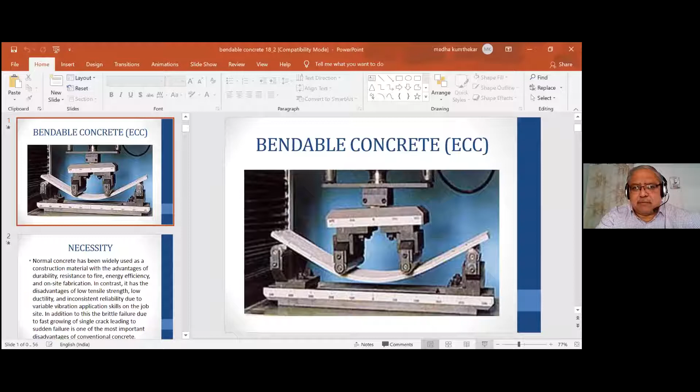This is what is called bendable concrete. This figure itself indicates how the concrete flat slab is undergoing deformation without any sort of failure signs in the form of cracks and so on. Because we cannot expect this type of property when the concrete is subjected to bending, subjected to flexure.

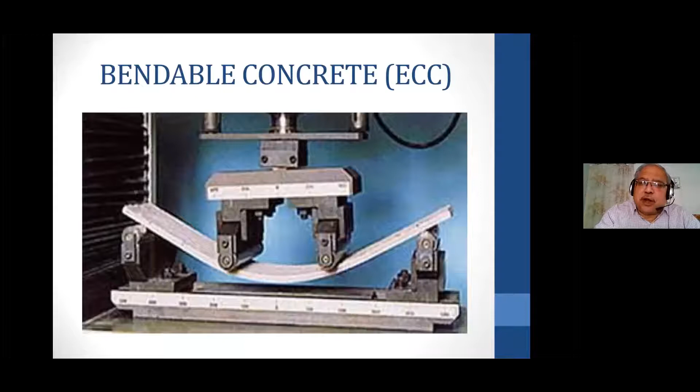Let me show you the necessity, and this is the point where actual failure may take place. Even at the time of failure, which is about to now collapse, there is no single signature, no single signal of a crack. Still, it has undergone a huge amount of deformation, which is not possible, which does not match the property of concrete. Hence, deliberately, the name given is bendable concrete. Technically we call it engineered cementitious composites. It is basically a composite structure.

It is basically a composite derivative of fine aggregate, cement, some sort of admixture, and mainly it uses typical fibers called PVA, polyvinyl type fibers. Here we are not using coarse aggregate, and hence we don't practically call it 100% concrete, but it is known as engineered cementitious composites.

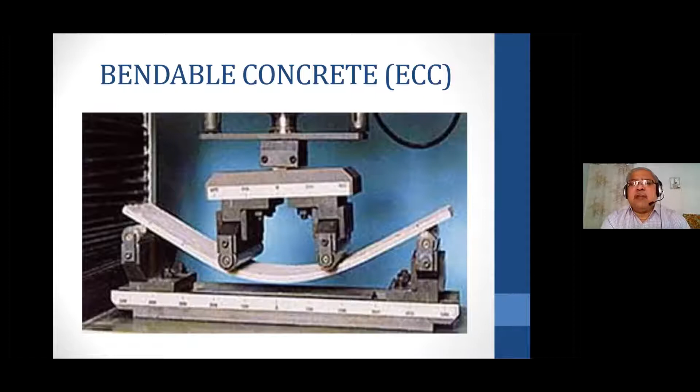What is the necessity? The necessity is very clear. As I said, concrete has inherent advantages: durability, resistance to fire, it is energy efficient, on-site fabrication is possible. We can pour concrete in any mold, in any shape, any alignment, because it has two phases.

What is called the green or plastic phase, and second is the hardened phase. But the major disadvantage is lower tensile strength, ductility, and inconsistent reliability due to variable vibration application and skill at the job.

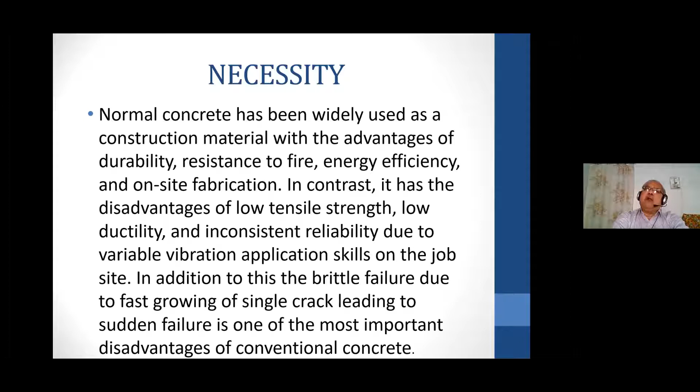Under such situations, it may lead to brittle failure, which is very risky, because in the case of steel structures, before it collapses, before it yields, it has what is called a plastic zone. If you test a steel bar under the UTM, you'll have some elastic limit, then it goes to the plastic stage, then it forms a hinge and collapses.

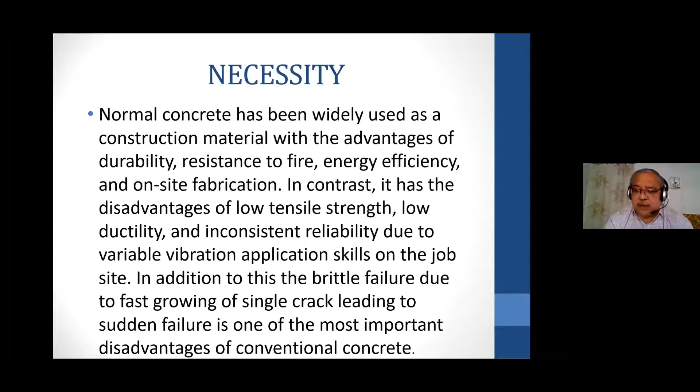But in the case of a concrete structure, that is not the story. When it crosses elasticity, it generates a crack, and after the crack generation, it leads to sudden collapse. This brittle failure creates a problem witnessed many times in the world, and that is why we have to change this particular property.

And that property, when changed, has other advantages, as I showed you in the first or second slide, where the concrete undergoes deformation without generating any crack. This is the introduction - conventional concrete is almost unbendable. The lack of bendability is a major cause of failure.

Considering this factor, bendable concrete has been developed, called engineered cementitious composites. Technically, it is a composite capable of exhibiting considerably enhanced flexibility. Let me tell you, my friends, in the Government College of Engineering, Karad, we could develop flexibility almost 600 times that of conventional concrete.

It is basically reinforced with fibers called PVA fibers. Since it was sponsored by L&T ECC, we could get the fibers from China at that time. But nowadays I was told these fibers are readily manufactured by Reliance and this group. Also some other competitors are developing them, so while it was slightly costly then, now it is comparatively cheaper.

ECC is made from the same basic ingredients, nothing changed, with high range water reducing agents, and we don't use coarse aggregate, hence it is more a mortar than concrete. It is just to prevent the problem of ceramic brittleness and rigidity, which is the basic behavior of conventional concrete.

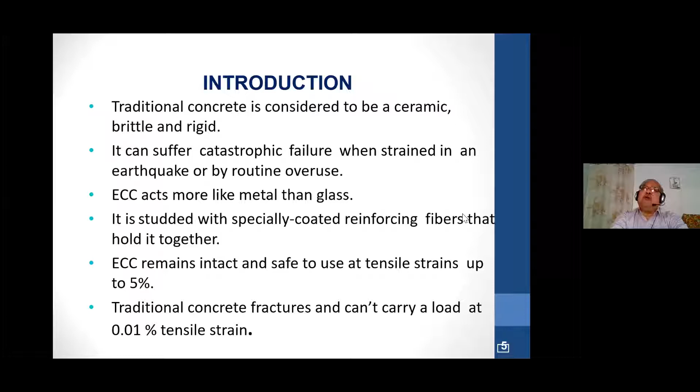Then ECC remains intact and safe to use at tensile strains up to 5%, which in the case of concrete we cannot even go up to 0.02 or 0.01, not even up to that range. Here we can exceed that, as you can see in the pictures I shared with you.

The concept of ECC is cement mortar-based fiber reinforced composites, which has superior ductility, almost 600 times the ductility of normal concrete in tension. These composites are composed of cement, sand, a small amount of admixture, and an optimum amount of fibers - polyvinyl alcohol fibers. ECC utilizes the same ingredients as FRC, except without coarse aggregate, and employs a much smaller amount of fibers than most high performance fiber reinforced concretes.

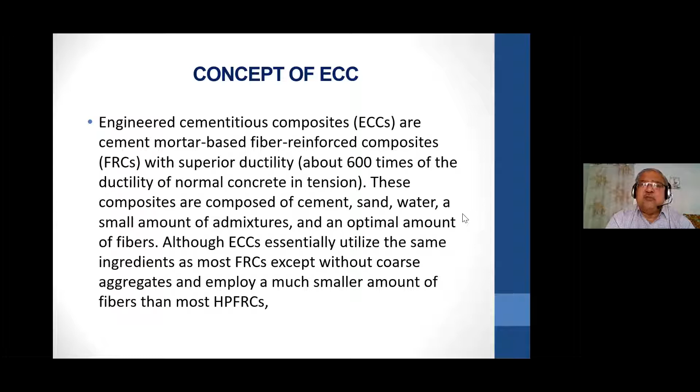In the case of high performance fiber reinforced concrete, the fibers may be between 2% to 5% or even more than that. Here we are using a very small amount. I will share the mix design with you also. These are simple ingredients, nothing special except the PVA fibers.

As I said, this concept was first developed by Professor Victor Li of Michigan University in the US. Here, the employment of PVA fibers is basically to increase what is called ductility.

Fly ash is a filler. And as it is a pozzolanic admixture, it gives the advantage of, one, improving the workability by acting as a ball bearing. Second, the heat of hydration is reduced to a great extent. Third, as the heat of hydration is reduced to a great extent, thermal cracking is not induced. As normally the crack is not developed, there are no chances of propagation of the crack, and hence the brittleness of the concrete can be reduced to a great extent.

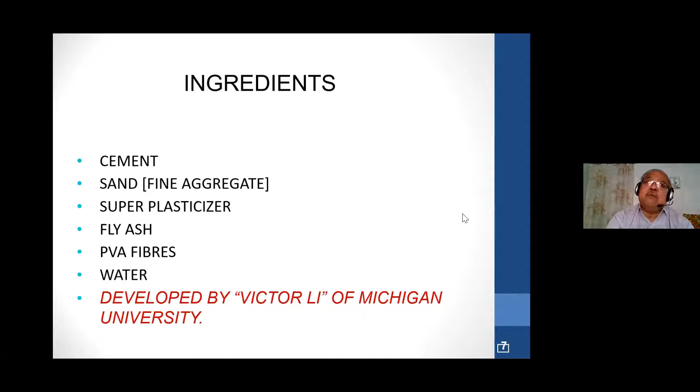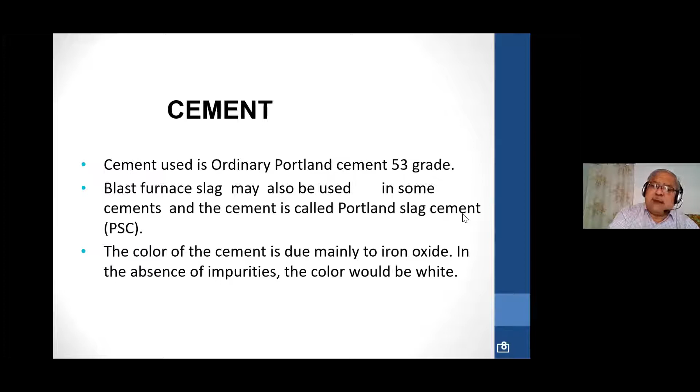This is the cement - in fact, we normally use conventional cement. Blast furnace slag can also be used because it has the inherent property of pozzolanic admixture. In fact, we used conventional cement at that time because Portland slag cement was not available, but now it is seen that using Portland slag cement, you can derive better advantages.

Nothing special - we have used typical fine silica sand, which is most desirable. We can also go for normal sand, but if normal sand is not available with the proper fineness modulus, we can go for blended sand. Fly ash, silica fume, blast furnace slag - anything which is pozzolanic can also be blended. In our case, we went with fly ash.

What is this super plasticizer? It has a major use in this particular thing. As I said, when the concept of plasticizers emerged maybe 15, 20 years back, when we were in the field, the concept of the plasticizer was to create deflocculation system. Flocculate is basically material coming together - when chemicals were added, deflocculation of the material used to take place, and then workability was automatically enhanced.

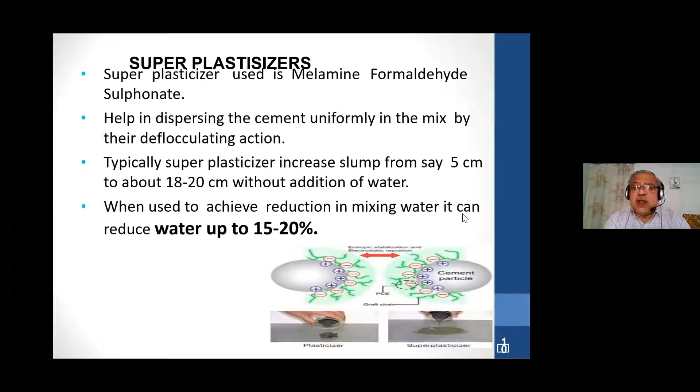But today we have one more class, rather an enhancement of the class, called super plasticizers, where these materials induce what is called charges, positive or negative. As everybody is aware, like charges cause particles to repel rather than come together. As the particles are separated due to this electrostatic phenomenon, we get better workability. That is why a small dose of super plasticizer is equally enough to achieve workability enhancement. When used to achieve reduction in mixing water, it can reduce water content up to 15 to 20%, depending upon the mix design you carry out.

Fly ash, the same thing - I again say fly ash is nothing but high reactive silica. It is not the ash which comes out directly from the chimneys of the thermal power plant - let us remove that wrong notion. We have this fly ash which is collected from the stack of the chimney by a process called electrostatic precipitation. This is successful in reducing heat of hydration without loss of strength, and increases ultimate strength beyond 180 days, while providing additional fines for compaction.

It has multi-phase advantages. One, these pozzolanic admixtures generate or trigger secondary CSH gel formation from material which is practically useless for us - that is nothing but calcium hydroxide. If we don't take care of this during the hydration process, many of you working in the field will find, when you de-shutter concrete - mainly for slabs or beam column junctions - white patches. These white patches are purely due to free lime, calcium hydroxide, Ca(OH)2. This hydroxide is basically inert in nature, nothing to do.

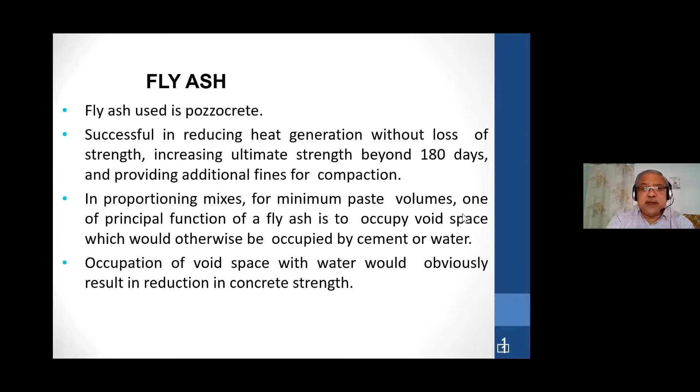At the same time, it also becomes what is called green concrete, because we are using material that would otherwise be waste and would disturb environmental stability. Hence this is also a typical type of green concrete. Occupation of void space with water would obviously result in reduction of concrete strength, which is eliminated in this particular case with the use of fly ash.

As you are aware, fiber reinforced concrete is not at all a new thing. We deliberately mix fibers into concrete, which is called fiber impregnated concrete. These fibers are used for many purposes.

One purpose is abrasion resistance, mainly to increase resilient property, shock absorption, increase tensile strength, reduce permeability of the concrete, and reduce crack formation and propagation. Hence these are now an inherent material, commonly used where concrete is subjected to abrasive stresses, impact stresses, and strain energy. Whenever these types of conditions exist, normally we prefer fibers.

There are a number of fibers in use. Some commonly adopted are glass fibers. It may be what is called polyester, nylons. It may even be carbon fibers, which are called smart fibers. If you know the term bulletproof jackets, they are nothing but applications of fibers.

These fibers can resist shock and transfer the energy or momentum that hits the body of the concrete more effectively. Hence these have a lot of applications in concrete technology.

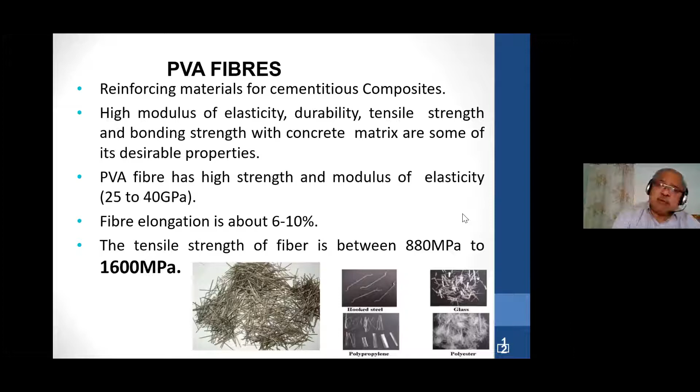These fibers are flexible in nature. They can be placed in any direction, and they normally work by standing perpendicular to the direction of crack propagation. Hence they are commonly called crack arresting fibers.

Regarding water: regular conventional water with pH between 6 to 7 is normally recommended, because concrete itself is alkaline material. So water should have a pH between 6 to 7.5, which is most desirable. The only requirement is it should be free from organic impurities, because along with the water, they enter into the body of the concrete.

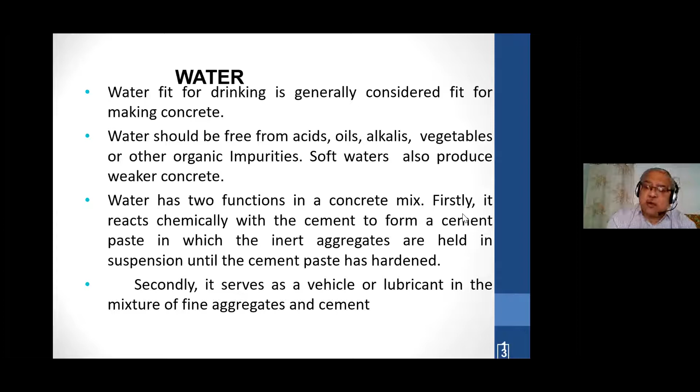If the material is organic, biodegradation may take place and create voids and so on. Hence, the water should be potable water - that is enough. Salty water is risky because when we add salty water to the concrete, there is a problem of leaching, a problem of corrosion, and a problem of accelerated formation of cracks. Hence it should be simple potable water which has to just serve as the lubricant. It has to increase the workability in an optimum fashion, and it has to cover the matrix of the aggregate to get the strength. This is the simple reason.

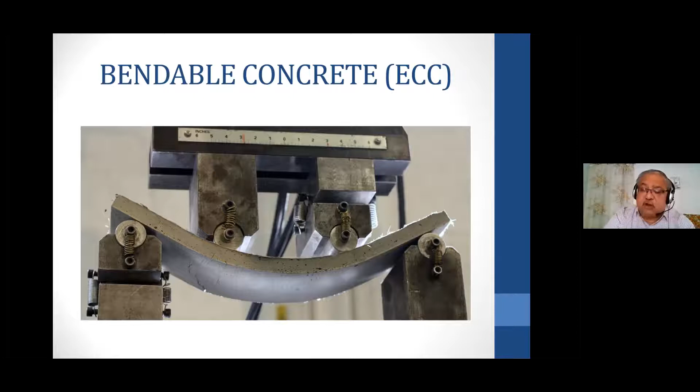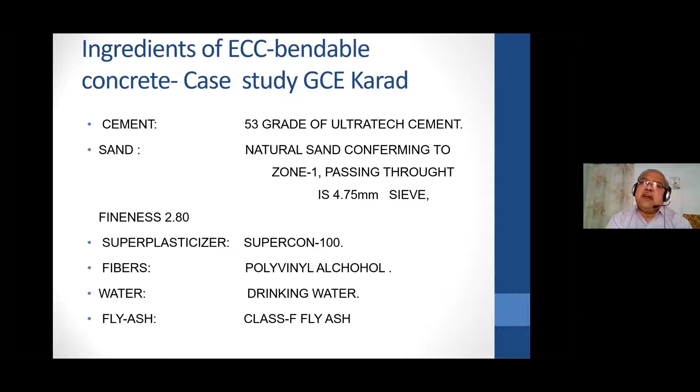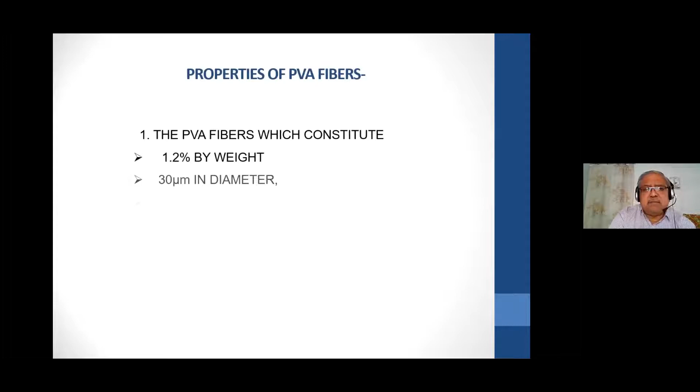Fibers were polyvinyl alcohol fibers supplied from China. Conventional drinking water was used, and the fly ash was class F fly ash, which we brought from the nearby Eklahare power station from Nashik, because that was the nearest supply of fly ash. These are the properties that we had tested for the fly ash.

The PVA fibers constitute 1.2%, and are 30 microns in diameter - 30 microns means half of my hair's diameter. We chop those pieces into 6 mm bar length, because if we place them in a bundle, or in unnecessary longer length, it is going to act as a nucleus - it will basically bundle at only one point. There should be proper dispersion of the fly ash and the PVA fibers, and the dispersion should be uniform throughout the body of the concrete.

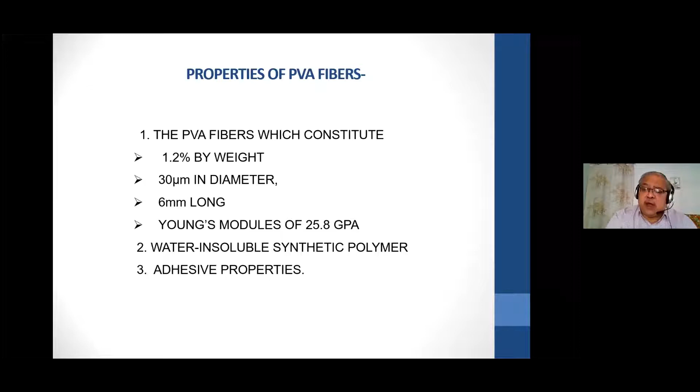To ensure that, this is basically called the aspect ratio of the fibers. We maintained that aspect ratio by considering the diameter to be 30 microns, and we kept the 6 mm long chopped pieces, thoroughly mixed uniformly throughout the body of the concrete. The Young's modulus of that particular fiber, when tested, was 25.8 GPa. Water-insoluble synthetic polymer was used, and they have some adhesive property. Basically, we could produce a better type of result.

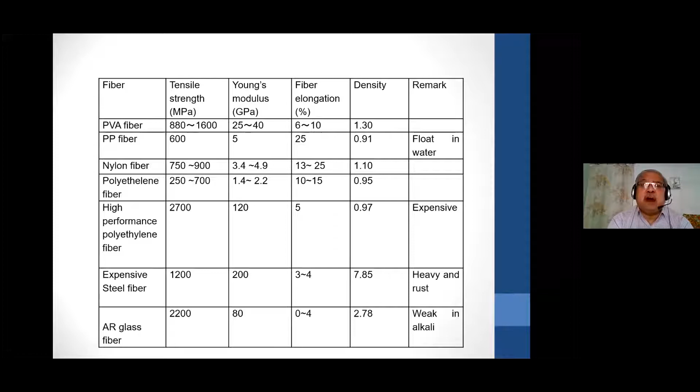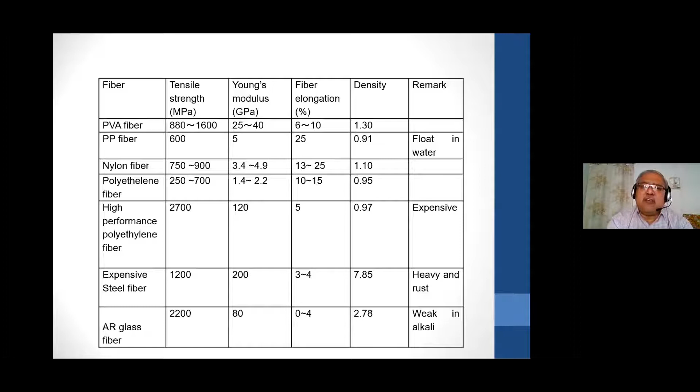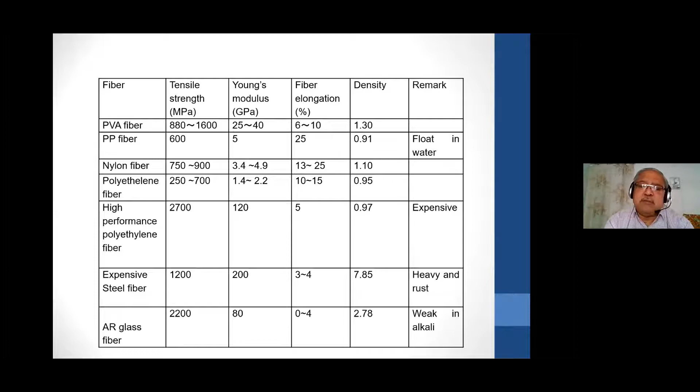We have tested so many fibers before accepting the PVA fibers as the best suited fibers for the ECC. We tested PVA, polypropylene, nylon, polyethylene, high performance polyethylene, expensive steel fiber bars, and AR glass type fibers. Every fiber was tested in the laboratories for various properties - tensile strength, Young's modulus, elongation, density, and so many other things. We found that the PVA fibers gave us better results compared to the others, because we could not take a chance with this particular mix design, since ultimately it was used for the monorail, where the structure is subjected to heavy static, dynamic, and rolling loads.

And after doing this, we could find out the PVA fibers like this.

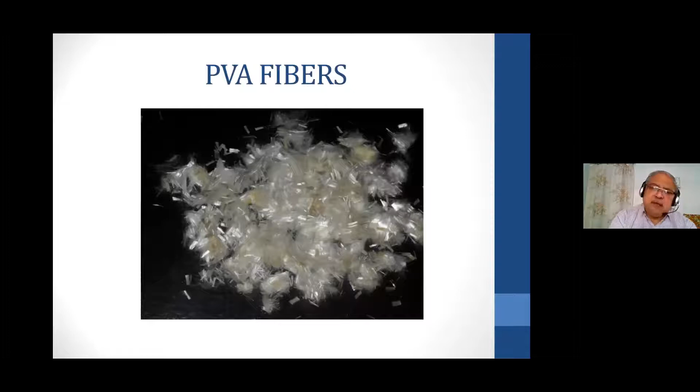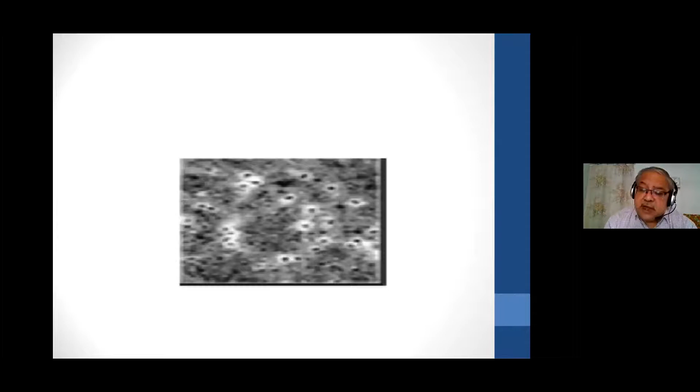After chopping, we got the PVA fibers like this. We cannot just dump them like that; in fact, they must be placed in a very typical fashion so that under the scanning electron microscope, this was the structure of the fibers. You'll find there is no gap left out. The fibers are placed in a very different way, dispersed very perfectly and uniformly, and then we could start with the mix proportion.

The mixing included cement, fly ash, and fine aggregate. We started with so many things. Ultimately, 1.2% by volume was found to be qualified. The superplasticizer used was 1040.47 ml per bag, and the water cement ratio was kept very low, at 0.274.

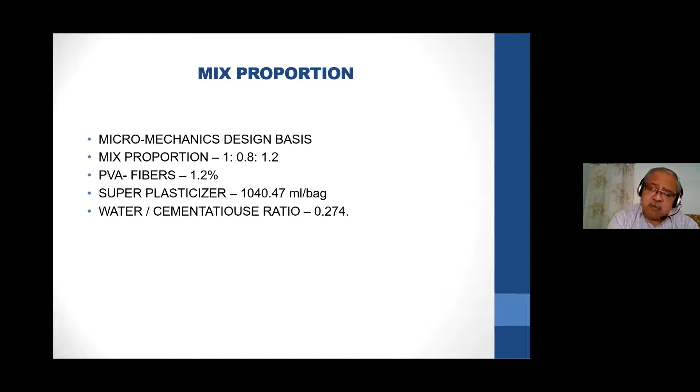As I said, we could maintain this purely due to two things. One, since there is no coarse aggregate, workability is not a great issue. Second, the fibers help increase the workability. Third is the volume of fly ash—since the particles are very tiny, more than the cementitious particle, every particle acts like a ball bearing, and we could easily get the workability.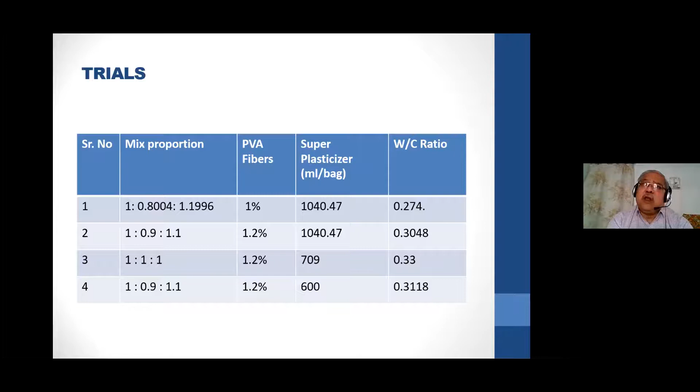This is how we started. We considered so many trials—this is a trial mix, a combination of various materials. These are the trials we thought of, by changing the mix proportion, the percentage of fibers, the superplasticizer dosage, and accordingly the water cement ratio. Almost 100 trials were carried out with all these combinations.

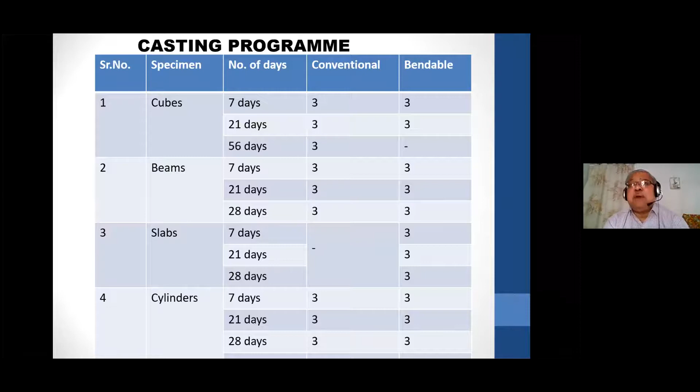We also cast cubes, beams, slabs, and cylinders to conduct all possible tests required to verify and audit the performance of the PVA concrete. Tests were carried out at 7 days, 21 days, and basically 56 days to begin with, just to check whether the strength gaining mechanism was going as per our expectation, following the path precisely, or whether there were abrupt changes in the strength or properties of the concrete.

To begin with the final tests, we tested in the presence of the L&T people. Compressive strength is very essential to decide the quality of the concrete, because this characteristic compressive strength is essential to understand whether the concrete can take the loads or stresses.

Split tensile strength—as everybody knows, we cannot carry out direct tensile strength tests on a concrete specimen. It has to be in the split form, where the cylinder is placed under the UTM along its length, and we measure the stress required to break or rupture it. Using the empirical formula, we could understand the tensile strength of the concrete.

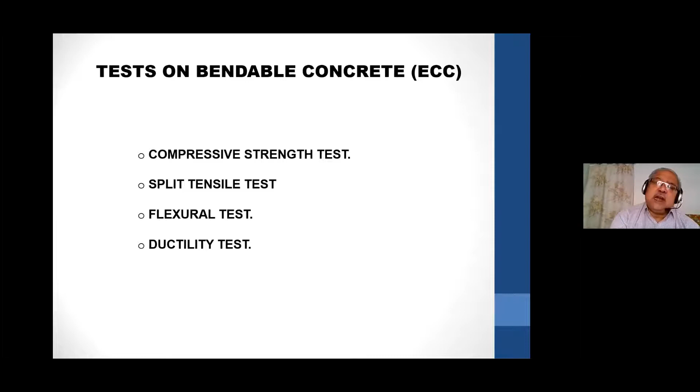Flexural test, in fact I have shown you—basically a beam or the flat portion of a slab of concrete is taken and put under the UTM. We check how much flexibility it can receive, and the ductility before really going for cracking—what type of deformation it can sustain. That is also carried out.

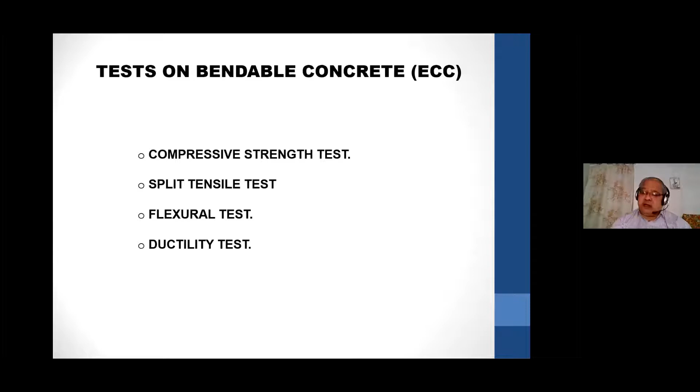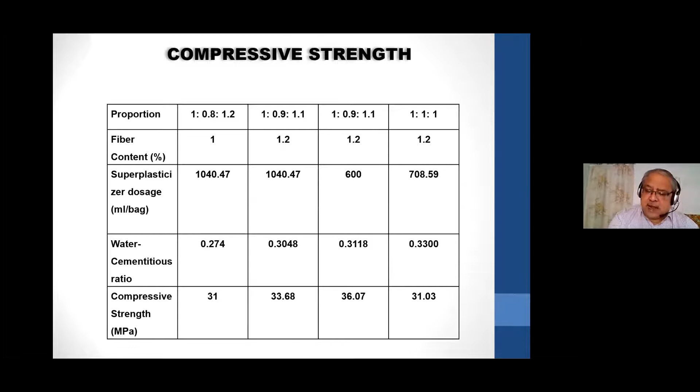These are the compressive strength results for the various proportions we carried out, where we changed the water cementitious ratio, superplasticizer dosage, and fiber reinforcement. After doing all these combinations, we could test the fiber, and this was the compression strength with age. You'll find it is perfectly linear after some time.

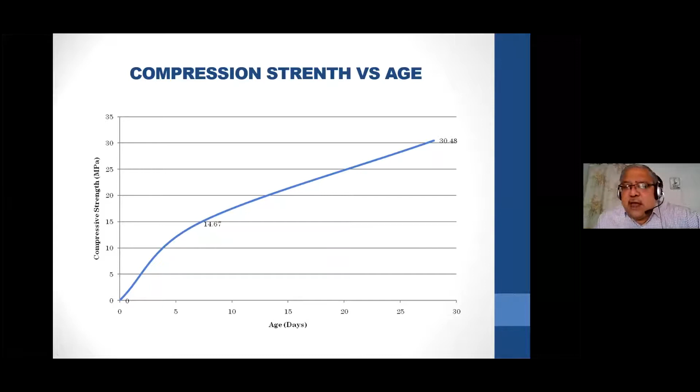This is because, due to the presence of the pozzolanic admixture, the secondary CSH gel started forming after around 16 to 17 days. In the normal conventional case, the graph could have flattened out somewhere, because in conventional concrete the strength gaining mechanism normally becomes almost flat after 28 to 30 days. But here, the strength increasing mechanism continued, and will still continue up to 180 days or so. Hence, as the age passes, the compressive strength goes on increasing—this is the beauty of pozzolanic concretes.

Then we went for the split tensile strength, as the concrete is good in compression but weak in tension. At the same time, when structures are put under loading and in use, over and above the compressive forces and compressive stresses, it is also subjected to tensile stresses.

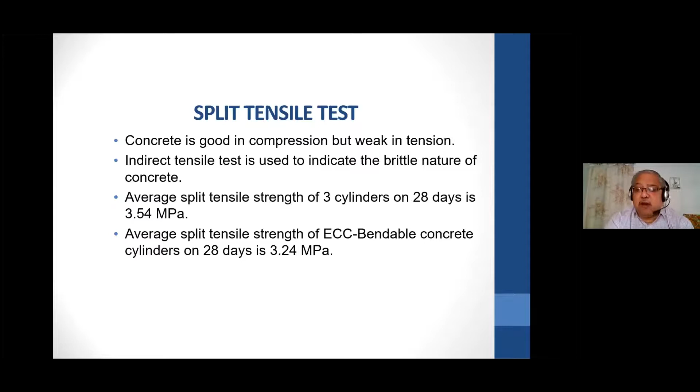Of course, we take due care of proper reinforcement, using proper stirrups and all, which are meant to take the tensile stresses or shearing stresses. But why not enhance the tensile strength of the concrete with the help of fibers? Keeping that thought in mind, we also carried out the split tensile strength test with the help of the cylinder put under the UTM.

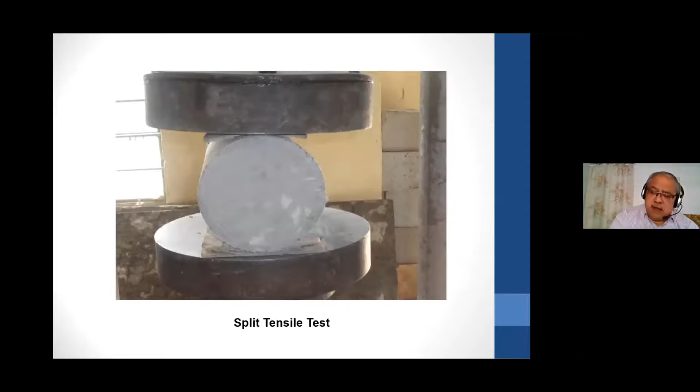This is a picture from our lab, where when it was put to the final load, this type of rupture or split was observed. When we calculated this reading empirically, we found an improved version of the product, having almost 10 times its own tensile strength.

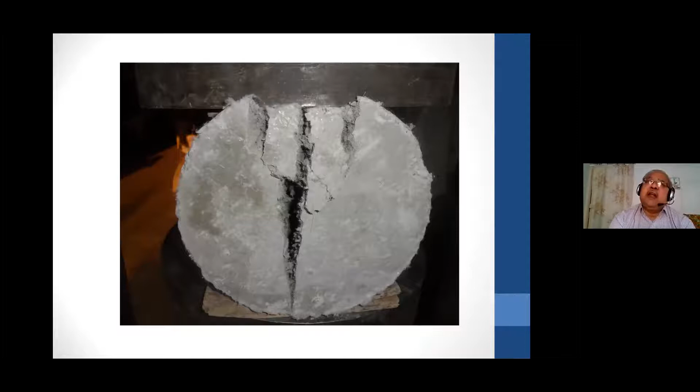For that, we took a cylinder and attached dial gauges to understand the strain developed. Stress was easily calculated when we know the load along with the cross-section area. The stress was known, the strain was known, and we could find out. People claim different things, but we tried to find out what we really get in our laboratories.

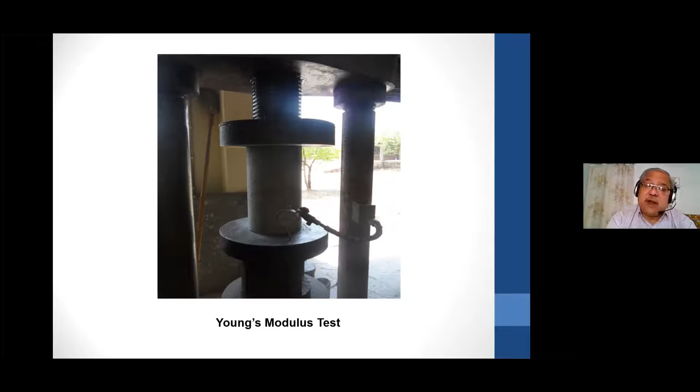We also carried out the load deformation curve for the standard cylinder. This was the picture and this was the result. Theoretically, it should have been a straight line. But practically, we got something shown in orange color - almost a matching.

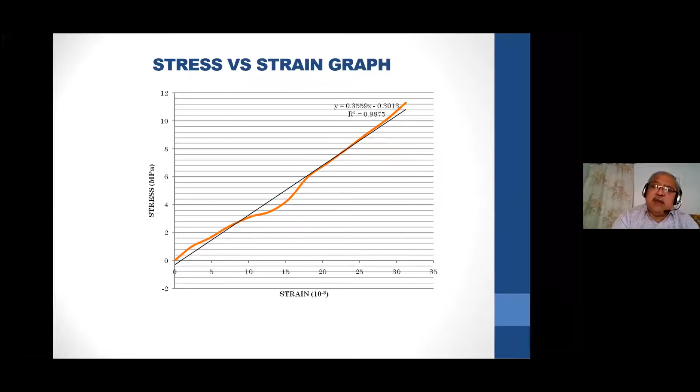In our conventional concrete, it would have broken at this particular level only. But as compared to this, see how it has reached higher levels, and hence the modulus of elasticity can very well be established by conducting this particular test. We also conducted the flexural test.

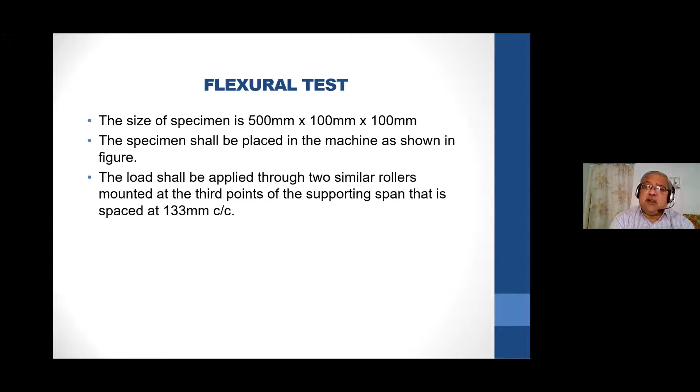Tensile strength is good, so compressive strength is naturally very high. But at the same time, what is its behavior under bending, under flexure? That was also one of the things which needed to be verified, and hence we prepared the specimen of 50 centimeters long, 10 centimeters wide, and 10 centimeters deep. This specimen was placed in the UTM.

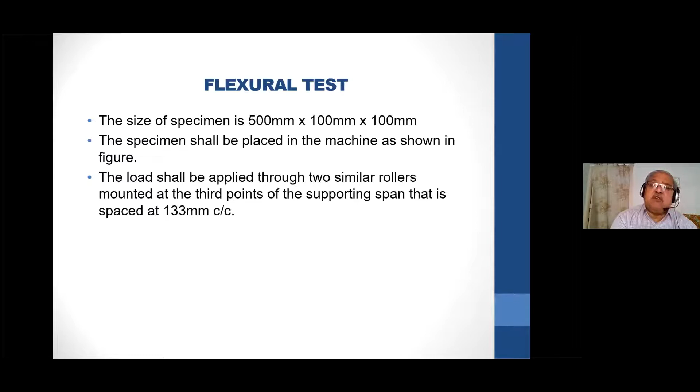The load was applied through two similar rollers mounted at the one-third point of the supporting span, placed at almost 133 mm center to center. The test was carried out and we got really wonderful results as far as the average flexural strength is concerned. Not only this, but as the age goes up, the average flexural strength also goes up.

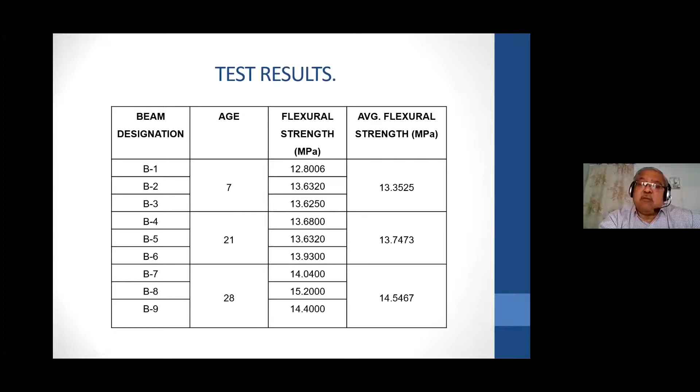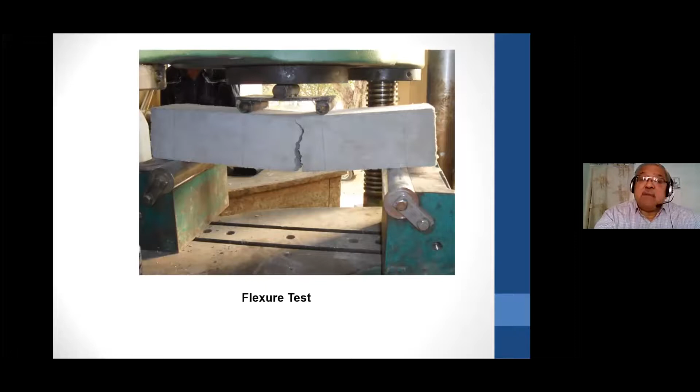At one-third or one-fourth of it, that particular slab should have collapsed. But here it is not showing failure. It may go on taking more stresses, but we deliberately stopped at this particular point. This is the major advantage, the major plus point, of this type of engineered cementitious composite. This is how you can see.

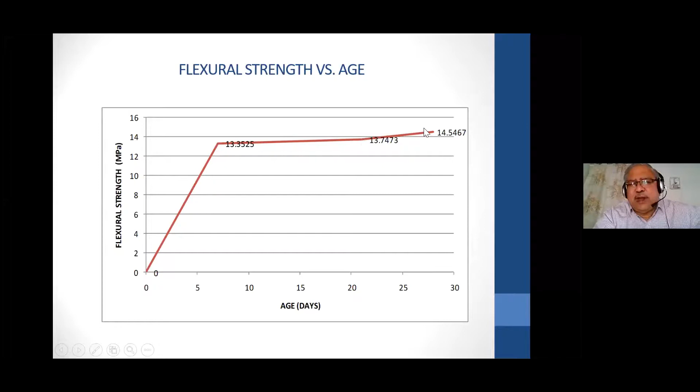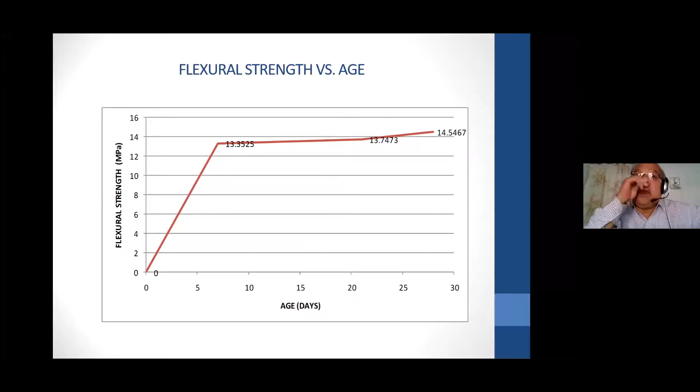After this particular thing, the flexural strength slightly increased. It just went up and then collapsed. But you can find out how much enhancement in the flexural strength has taken place. And not only flexure, you can see simultaneously the brittleness of that particular structure, how it has been reduced to a very high extent. It is giving you enough signal before it collapses, which is not the common story with concrete structures. This is the bending stresses we have calculated.

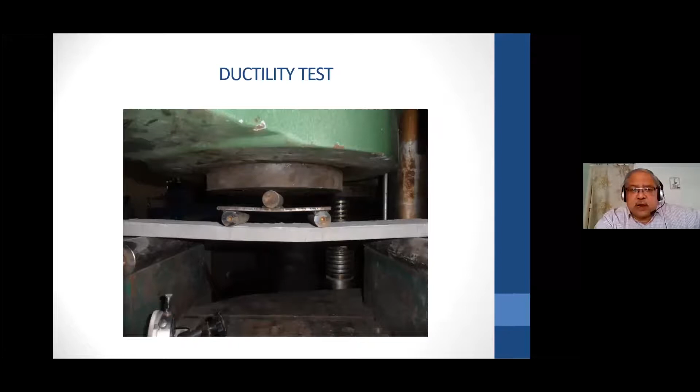The ductility also we try to calculate. See how it is now undergoing this particular value. The structure, or still the integrity of this particular member, is very much valid, which is one of the important achievements of this particular project. See the test results: 7 days, 28 days, the average deflection in mm at 12.16, 14.36 and all, which is really a remarkable one.

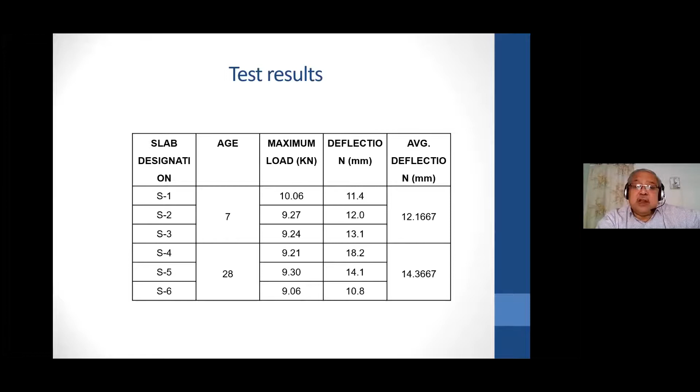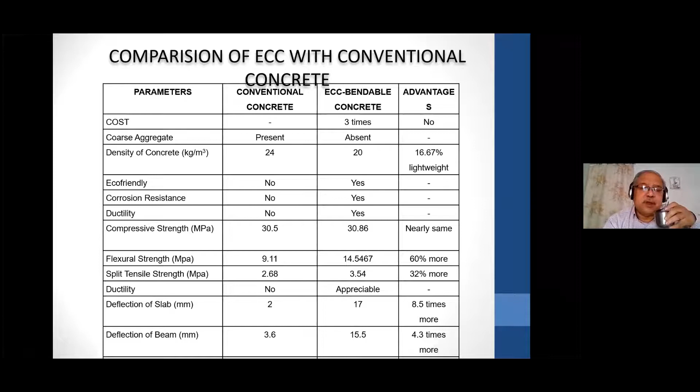Now let us come to the cost parameters. At that time, let me share with you, the fibers were almost 36 to 37,000 rupees per kg, including the transportation cost from China and all other government formalities. It reached us at around 40,000 rupees per kg. Of course, we could manage it because it was again supported financially by Larsen and Toubro Group. So I'm telling you the story from almost 8-9 years back.

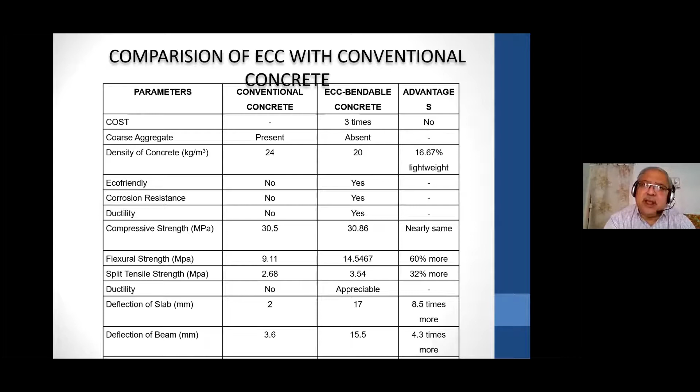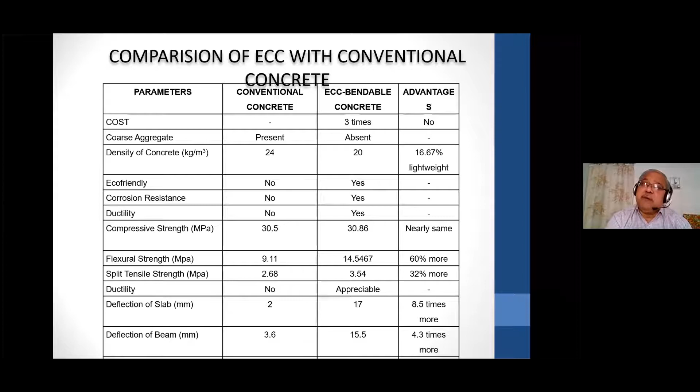Today, the same fibers are available at almost 6 to 7,000 rupees in the market - India-based, better fibers. And hence, whatever actual cost I have shown you, it will be hardly 1.5 times or 1.25 times more than that. If you go for more voluminous concrete, the cost will definitely come down. So no doubt it was a disadvantage at that time, but now, if you look at the performance cost, maintenance cost, thickness cost or volume cost, I think it is cheaper if you consider both tangible and intangible, direct and indirect costs.

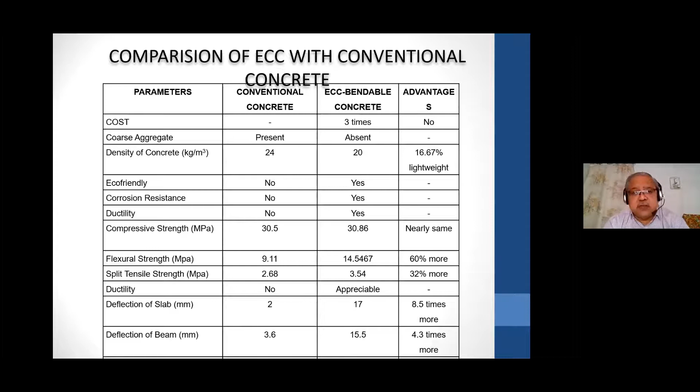The density of the concrete is basically lightweight, and hence whenever it is put to structural use, whenever it is put to earthquake seismic forces, this is going to have a better effect. It is eco-friendly, definitely corrosion resistant because no crack is permitted, highly ductile, compressive strength is almost the same, flexural strength is much higher, split tensile strength as I said almost 32% higher, ductility is appreciable. Deflection was 2 at the time of the typical conventional concrete sample, and in the case of eco-friendly or rather the ECC bendable concrete, the value was 17.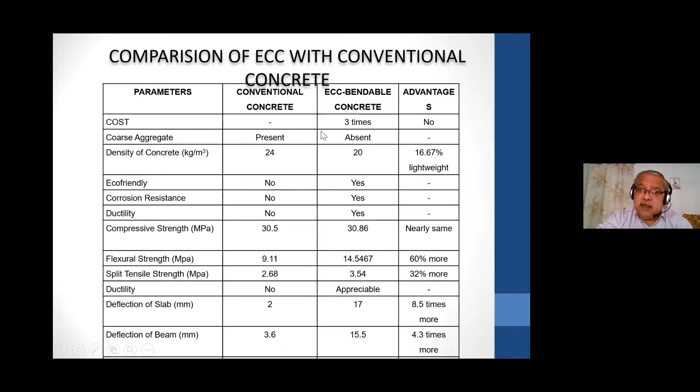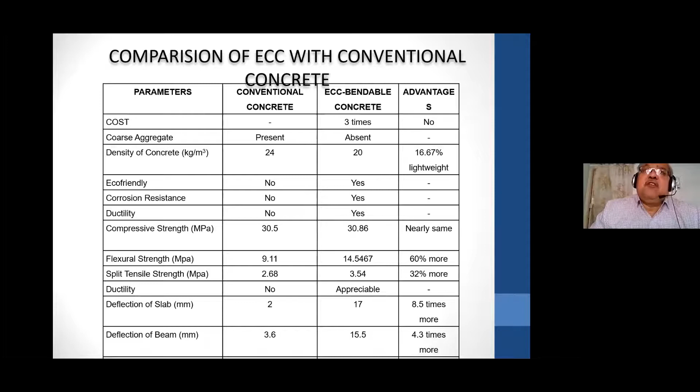You can find out how much more deflection it is - 4.3 times that of the controlled concrete mix. Now you can compare, even if it is 25% more cost, looking at these major advantages which conventional concrete cannot give us, it is much cheaper both from performance and durability perspectives. If you consider the buzzword sustainability, this is the best sustainable green concrete that I would like to present before you. These are the properties: ductility, durability, self-consolidation.

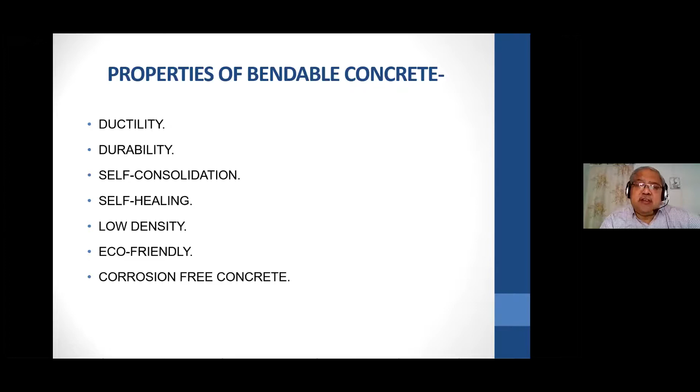Low density, very eco-friendly, corrosion-free - these are the major advantages which are now required to enhance durability, performance, and the sustainability aspect of concrete. These are the advantages: flexible concrete, bends like a metal, more stronger, more durable, lasts longer than conventional concrete. It has a self-healing property - it can heal itself using carbon dioxide and rainwater. It is not brittle like glass, more resistant to cracking, and it does not emit that amount of harmful gases.

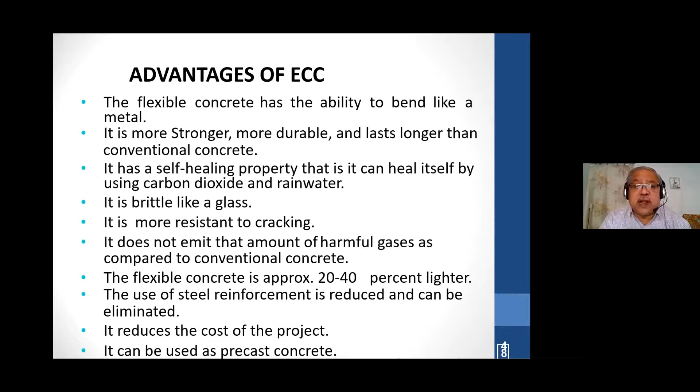Flexible concrete is approximately 20 to 40% lighter. The use of steel reinforcement is reduced and can be eliminated because it has better shear strength also. It reduces the cost of the project, mainly when you are going for the precast type of structures.

Mainly in the case of metros and infrastructures, where launching is required, such as incremental launching or side launching of girders, as it is lightweight, the launching cost and hoisting cost can be controlled. The only disadvantage was that at that time the cost was very high, but now the cost is comparable.

It requires a certain skill level for construction and needs special types of material which are difficult to find in some areas, where you really have to get that particular material from a specialized organization. Quality depends upon the materials used and the condition under which it is made.

So basically you have to go for proper selection of raw materials, and ensure consistent availability when going for high volume production. Compressive strength can be unfavorable in some cases if proper trials are not generated, but in our case, we got almost the same, in fact slightly better results. These are the noticeable disadvantages that we get from the literature.

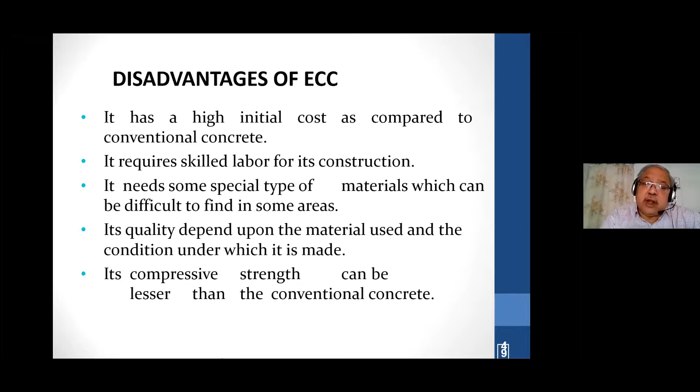Now let us come to the application, which is most important for all civil engineers. One application is as a protective layer for enhancing the corrosion durability of RC structures.

If the structure is damaged or more prone to corrosion, applying a thin layer on the conventional member subjected to corrosion can definitely enhance the life of the structure, because it is practically watertight. All the seals, gaps, and exposed parts of the damaged or diseased member can be controlled by applying bendable concrete.

This is mainly for bridges. When you move from one girder or one span to the adjacent span of the bridge, you'll always hear the typical 'katak' sound when moving from one span to another. Why does this typical sound, or jerk in your vehicle, occur?

The jerk is purely due to failure of a joint, technically called the expansion joint. Even at the start of the bridge, you will always find a typical jump as you enter the girder. This is called the approach portion, or approach slab, which many times fails due to failure of the expansion joint.

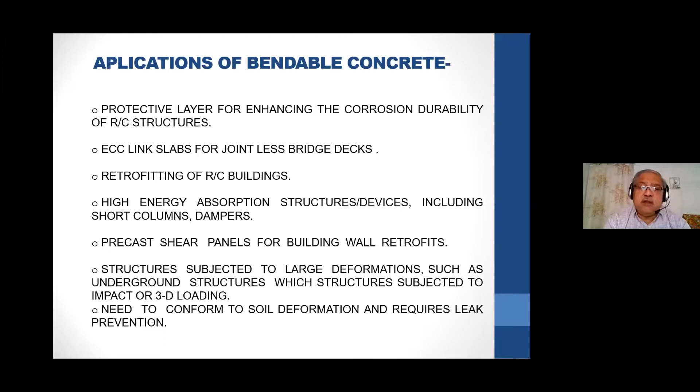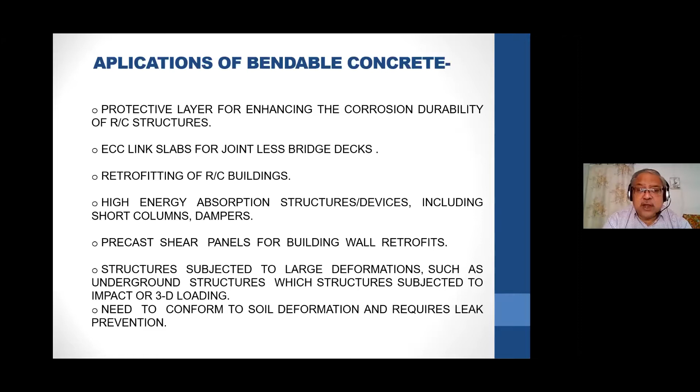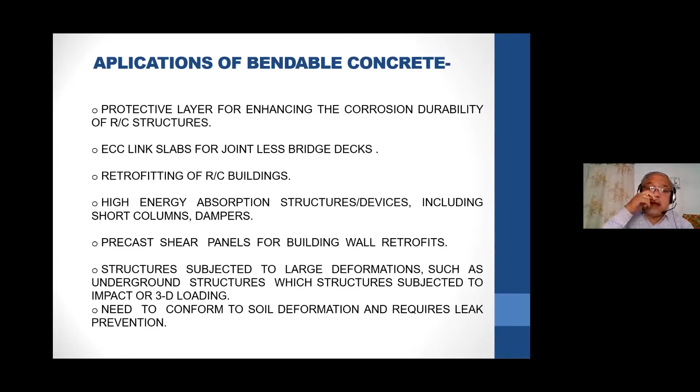Structures subjected to large deformations, such as underground structures or structures subjected to impact or 3D loading, are in demand today. There is demand for blast-resistant structures, mainly for military applications like storages and underground godowns, where this material's better resilience and shock absorption properties can be used along with conventional structural components. Hence this is the future concrete which will be used by many people in the next couple of years. Only thing required is leak prevention and conformation to soil deformation or soil properties, because if the soil behaves abruptly different, this concrete may not be that workable.

So remove that particular expansion joint and replace it with an ECC link slab on the girder. As the ECC slab has a lot of thermal expansion and shrinkage properties, it will not lead to the failure of the expansion joint, and the quality and life of the structure will be enhanced to a better extent, because the distance in this thing is likely to decrease or increase due to thermal temperature increase, leading to lengthening.

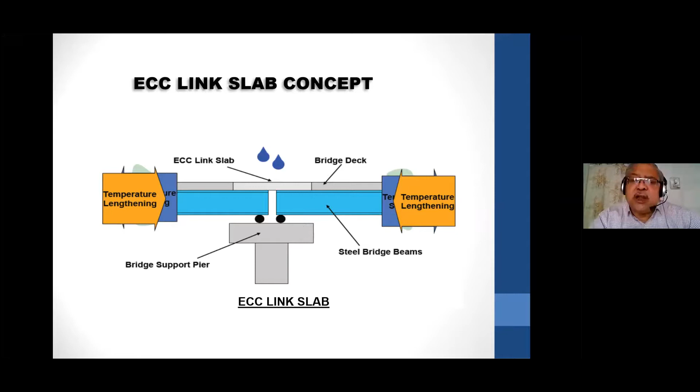And hence, why not replace this panel with a simple panel, hardly 1.2 to 1.5 meters. It is precast, just place it over there. You'll find a wonderful thing without any chance of leakages or corrosion. This is the major application of what is called bendable concrete.

One more issue is earthquake resistant structures. Earthquake resistance is basically improved by providing flexibility or enhancing the ductility of the members. In conventional concrete, when earthquake forces and provisions were not considered, buildings constructed 15-20 years back, when it was not mandatory to follow earthquake code provisions, these structures can really be repaired or retrofitted using a combination of the rigid members the building has and flexible members in the form of ECC.

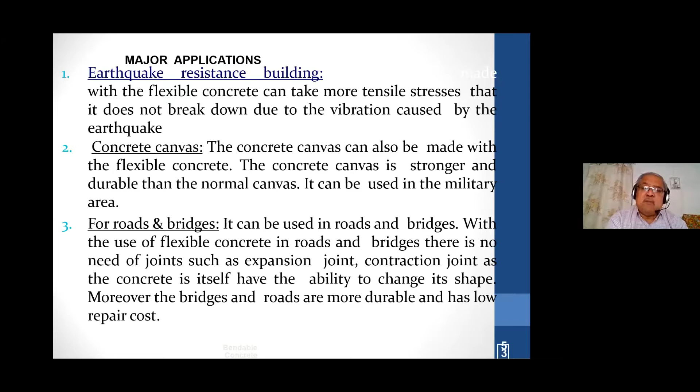A simple flexible canvas of concrete can be easily made for various different uses, right from structural use to practical military use, maybe for construction of various flexible things, even typical tents and so on. This can be very well used, which is called concrete canvas. And this concrete canvas, which is very flexible in nature, can be made more stronger and durable by using this type of ECC members.

For roads and bridges, as I already explained, when there are chances of failure under the expansion joint, the expansion joint can be replaced by a small panel of this ECC material, and hence the life of the bridge can also be enhanced.

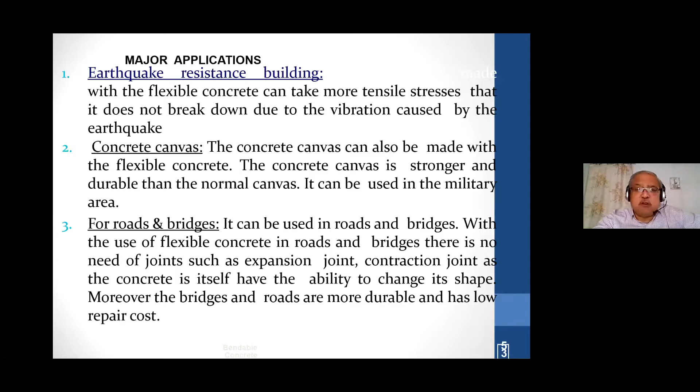This is earthquake resistant structure, an earthquake resisting structure in Tokyo.

You will find this type of structure was made resistant, retrofitted by providing external frame, shear walls, and coupling type links made flexible, something like the bony structure of a human being with flexible muscles, ligaments, and what is called tendons.

Similarly, stiffness is provided by rigid members and shear walls, and whatever deformation is required to absorb the shock due to earthquake is supplemented by ECC coupling. This type of combination will definitely work for a longer time.

The conventional structure's life can be enhanced, retrofitted in a better way. The life of infrastructures like bridges can be enhanced at the time of expansion joints. It can be suitably used when there are sudden bends, and all these properties are required in the case of intelligent traffic management.

It can be very well used for blast resisting structures, mainly for military and other applications. In the last 10 to 15 years, huge research work has been done on ECC, as this is the concrete of the future.

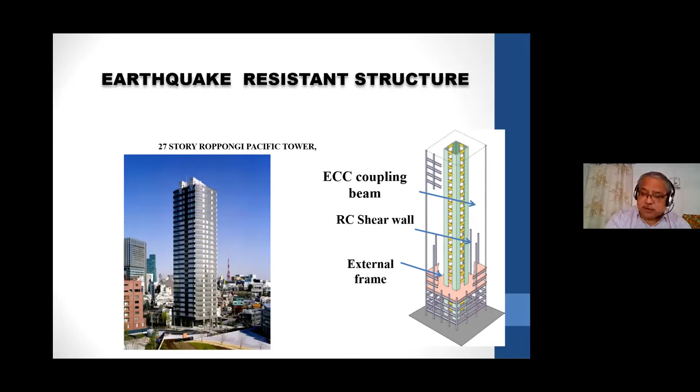This is the prototype I'm going to present. This is what I told you, the concept of the canvas. Very thin members.

But I can go for beautiful architectural structures. It can be used for tents, for military applications, typical shells with the beautiful designs expected by architects. This flexibility can be used by ECC in the form of canvas also.

So now the behavior of the concrete is totally changed. I cannot expect typical conventional concrete with these very small thicknesses to give wonderful usable shapes, simple tents, simple houses. So many things are possible using ECC.

The work is going on, but mainly, my respected dear friends, this is one of the concretes of tomorrow. In the previous discussion we had a long talk about self-healing concrete or bacteria impregnated concrete. That is one of the core areas where people are working and need to work, because this is also one of the advantages for durability and sustainability.

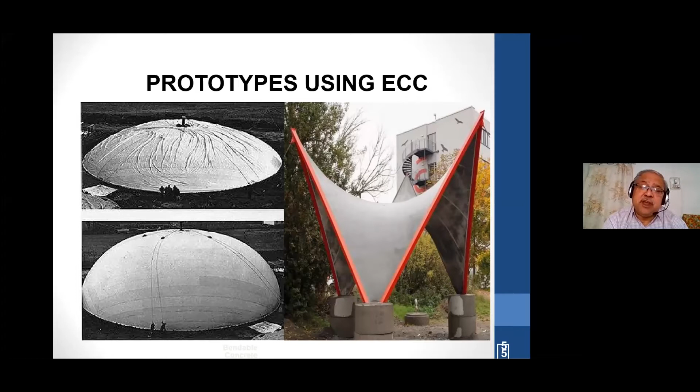Similarly, this is also a concrete which is going to help by making green concrete, using the green concrete concept where we use high volume of fly ash. So these are the new things that I would like to share, something about bendable concretes.

I request all participants, whether from academics or industries, this doesn't require much more expenditure. Many of these fibers are available under different names, and now Reliance is also manufacturing these types of fibers. Why not attempt to save the cost of the structure, enhance its durability, and ultimately lead to sustainability, without disturbing the futures of the next generations to follow.

This is something from my side. Thank you very much for giving an opportunity. I am very sure this course run really went successful. Many speakers who are eminent personalities in their own domains have contributed a lot in providing better knowledge in the various dimensions of concrete technology. Thank you, organizers, for giving me this opportunity, and I wish you the very best of luck.